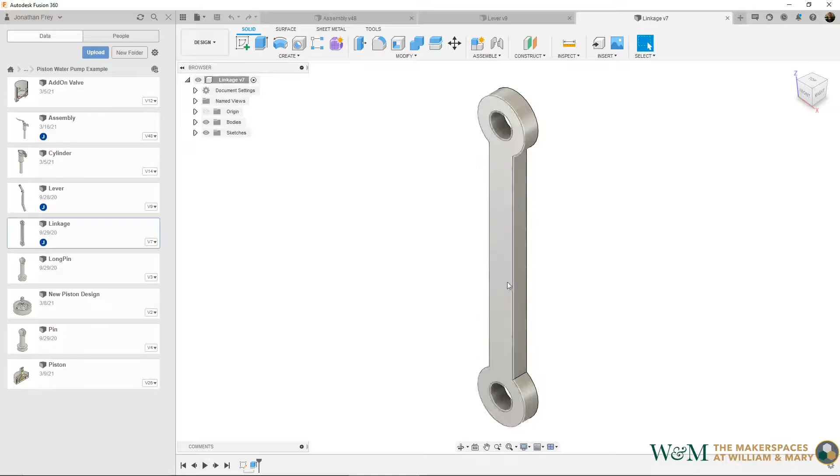So the last part of this piston pump design is how we actually put together the parts and then end up going through finite element analysis to look at where it's going to break. You will notice that I'm skipping over designing the individual components like the lever arm and the linkage pieces like this. These are fairly straightforward sketch and extrude type designs, so there's lots of information online that you can find to help you get through these. We're going to focus on the more advanced parts of this pump design, including putting it together and the simulation.

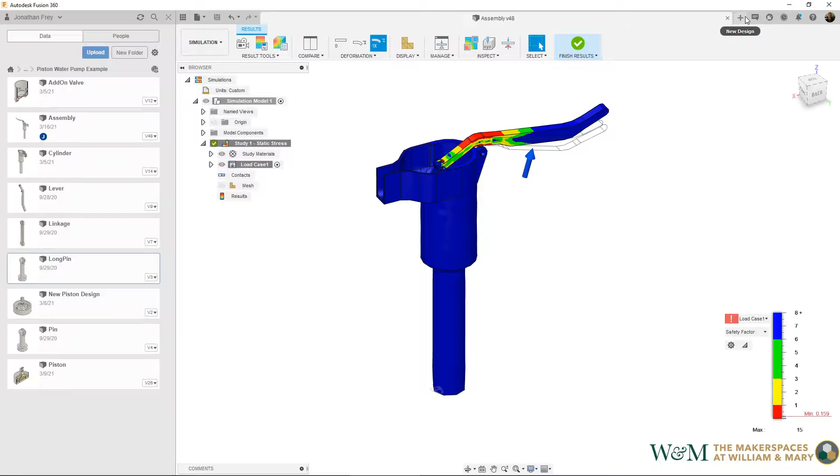All right, so to put it together, the first thing we need is all of our parts. As you can see, I have them here at the left. I like to keep everything in a single folder. I advise you to as well, although everyone's organization is different. And then we need a new blank file within which we're going to assemble things. So this is a new file. I will go ahead and save this as whatever, new assembly. And then I'll start pulling in the parts.

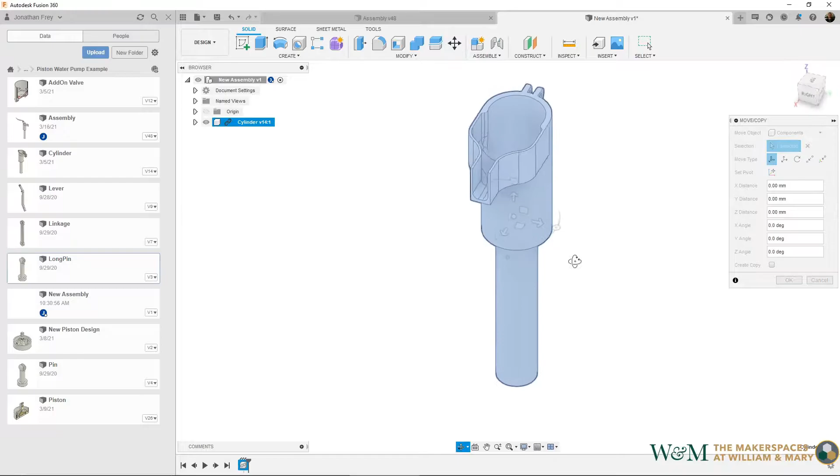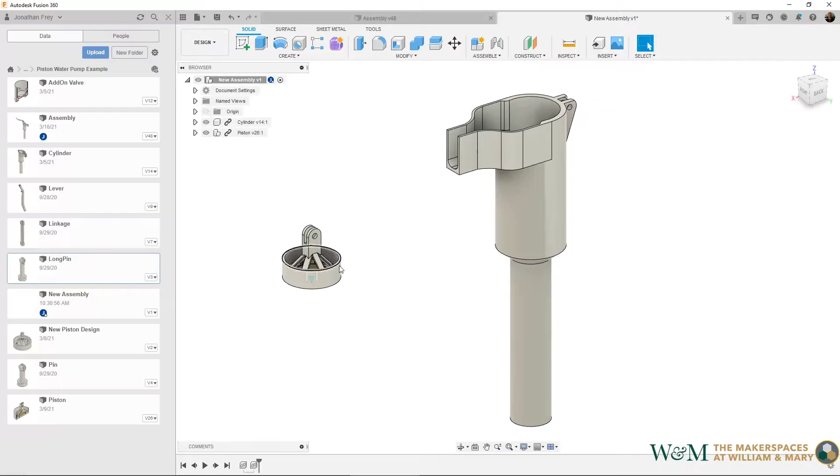I like to start with the biggest part first. How you build it is up to you. So I'll click and drag the main cylinder in, like so. There it is. And I'm just going to leave it right where it sits in the middle there. And then next I will drag in the piston head, which is right here. And I'm just going to move this out of the way so I can see it. Right. And we're going to start building our joints. So we've got the first two pieces and we need to put this one into this cylinder.

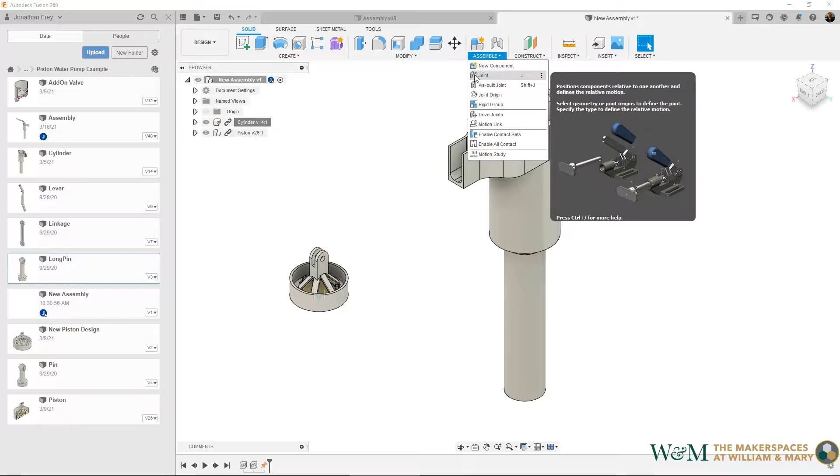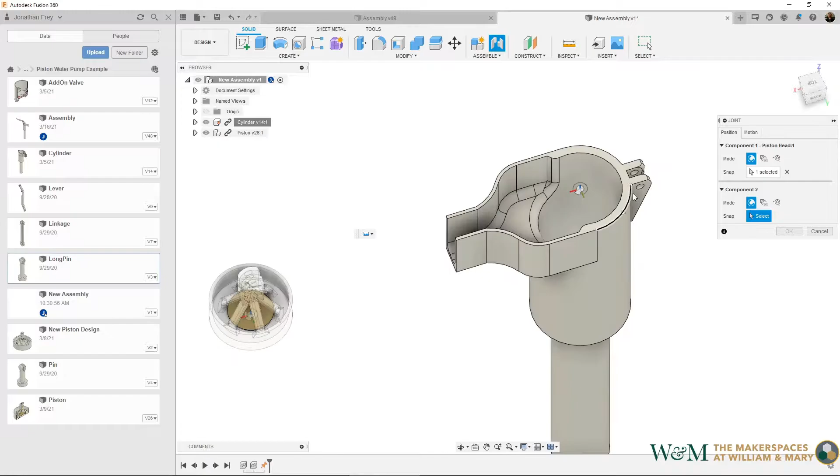So right off the bat, I'm going to ground my cylinder. That's designating it as immovable relative to everything else. You get that by right-clicking on the component and pulling it down to ground. Then I'm going to go to the Assemble menu and use Joint and joint the two parts together. The first one I'm going to do is this piston, and I want the snap point to be the center point here of the main body. So I will click that, and then I need to click in here where it's going to be jointed. So I will put this, let's say, at the top for now, like that.

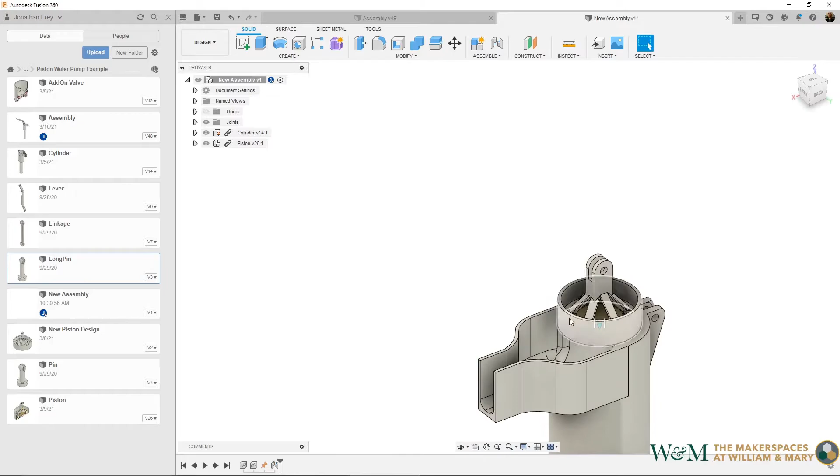And I want to make sure the motion that I've selected is a slider motion in the z-axis, like that, which it is. So I'll hit OK. And now we've got our piston head that can be pulled into and out of there. So I'm going to push it down just a little bit as I build this to make it easier. So put it there, hit OK, and anytime you move it, if you would like it to remain in that position, make sure that you go up here and hit capture position. And now that is the default starting point.

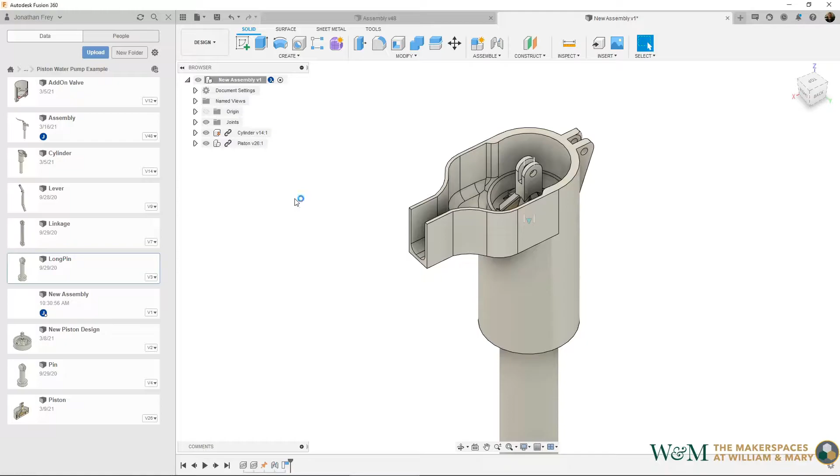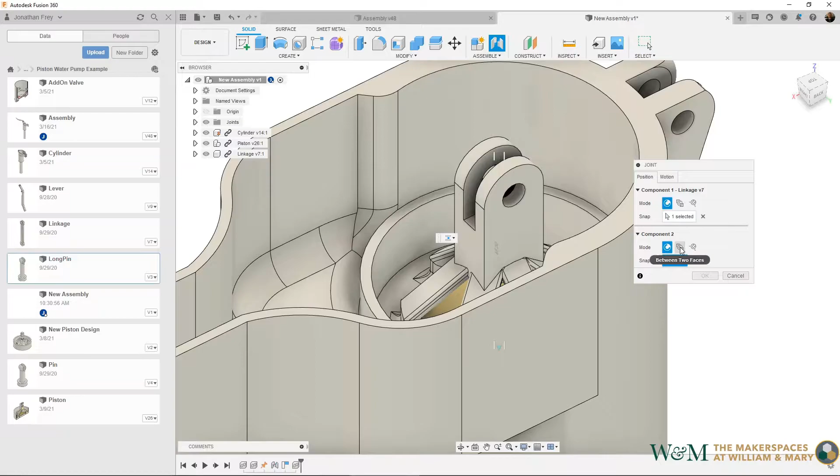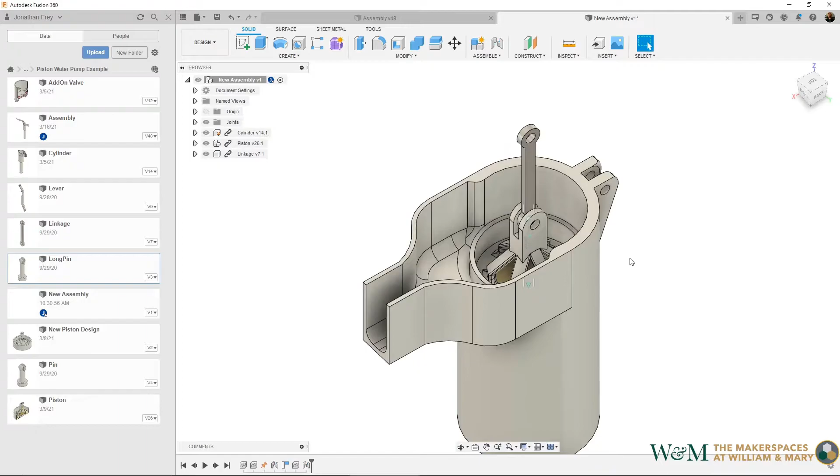Okay, so I've got the piston, I've got the cylinder. The next one up the chain is going to be the linkage here. I'll drag that in, move it over, and I want to joint this. I'm going to use the center snap point of this cylinder there, and then put it in between two faces, specifically that one and that one, at that center axis snap point. Now this is going to be a revolute joint. And there we have it. So hit OK.

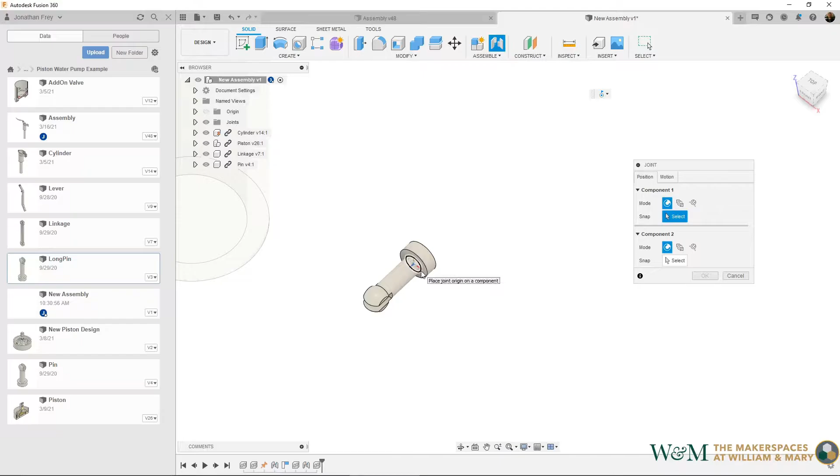I will go ahead and add the pin as well. For that one, I believe I'm using the short pin. So short pin in. We're just going to position it like that. And then do the same thing, just joint. In this case, I'm going to select there and there. Like so. That's a revolute joint because it can spin freely as well. Hit OK. Right, and I'm just going up and down the chain, building it out.

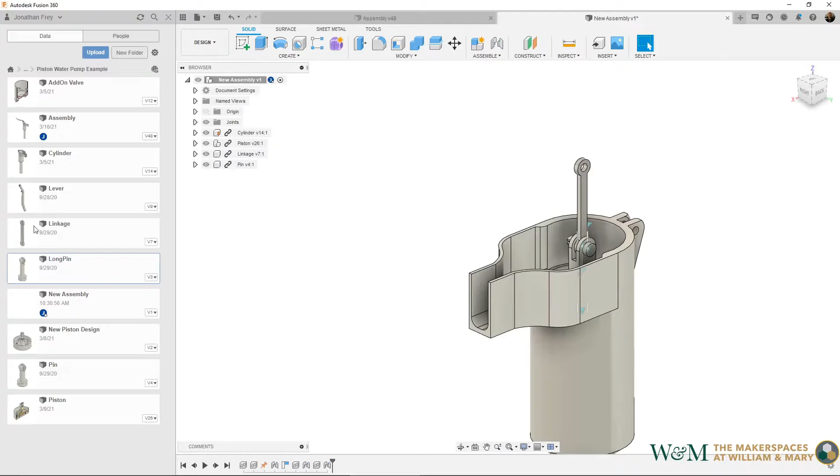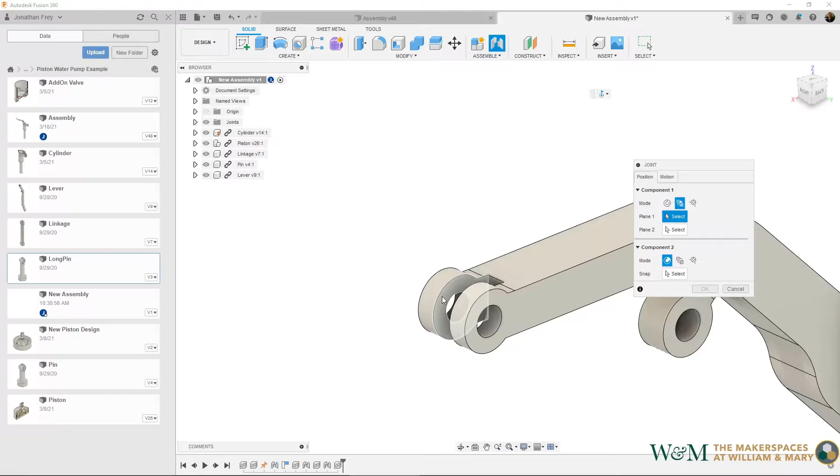So the next one is going to be the lever. We're going to move this over, and I'm going to swing this around so that it's roughly in the orientation that I want. It doesn't have to be perfect. Like that. And now again, joint. This is going to be one of those times where I'm using between two faces. That face and that face. And the snap point is that center point in the axis right there.

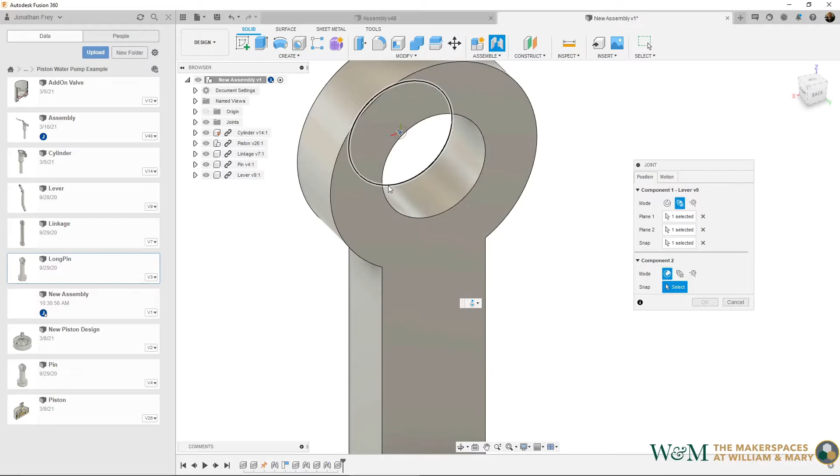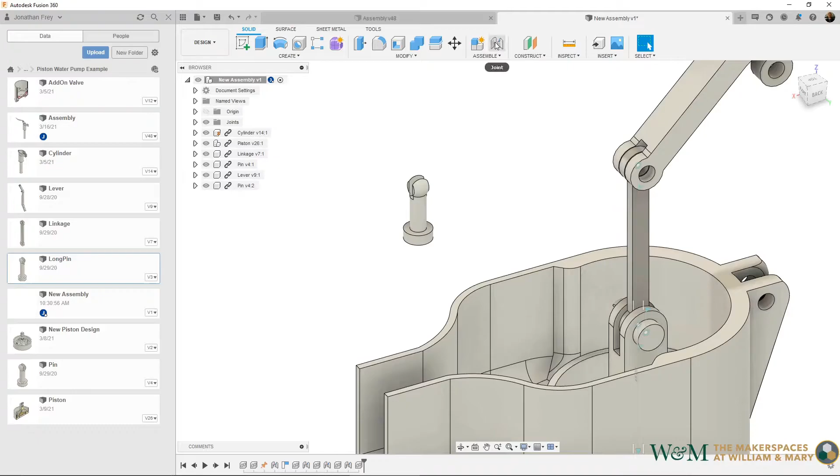And then I'm going to snap it to the center point of this axis, which, there it is, that point right there. Okay, and that is a revolute joint, so we'll hit OK and add in another pin. Now just to show you, I'm not going to orient this in the right direction. If you joint these together using the correct snap points, it should orient itself, like so.

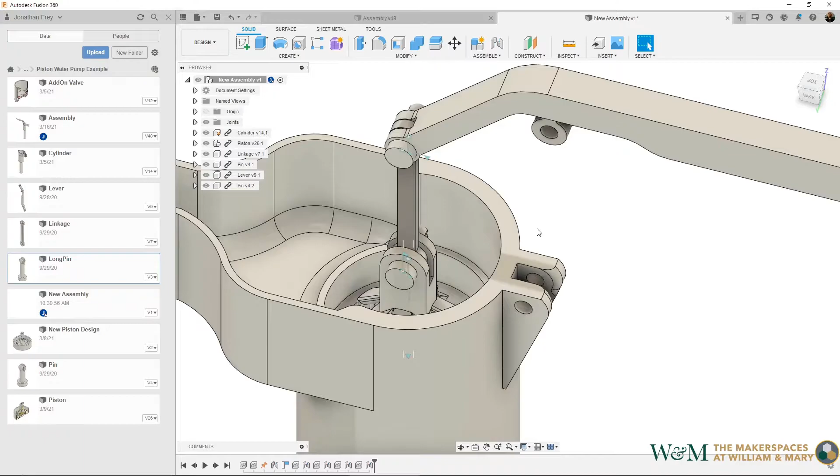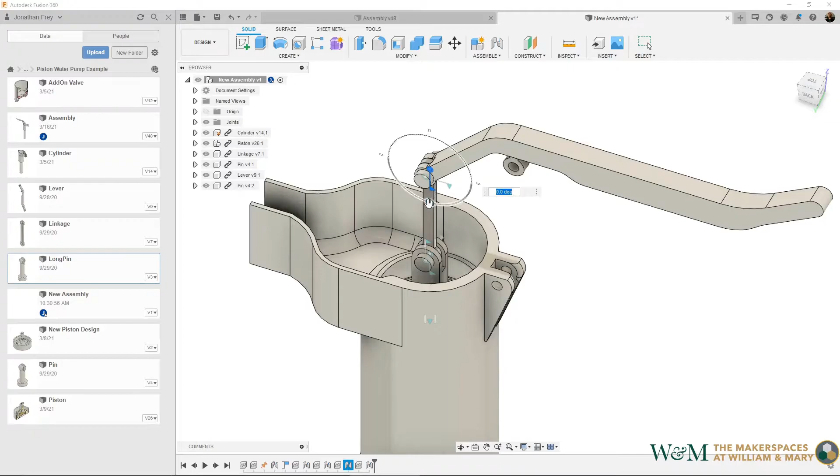Okay. Then the last place that I need to joint together is this one to here. Now when I do this, it should move the piston and everything else accordingly. But we're going to see. To get it closer, I'm going to go ahead and pull this. Let's rotate this actually. Oops, that's the pin. Okay. And then joint. Again, we're going to use this middle point of this axis, right?

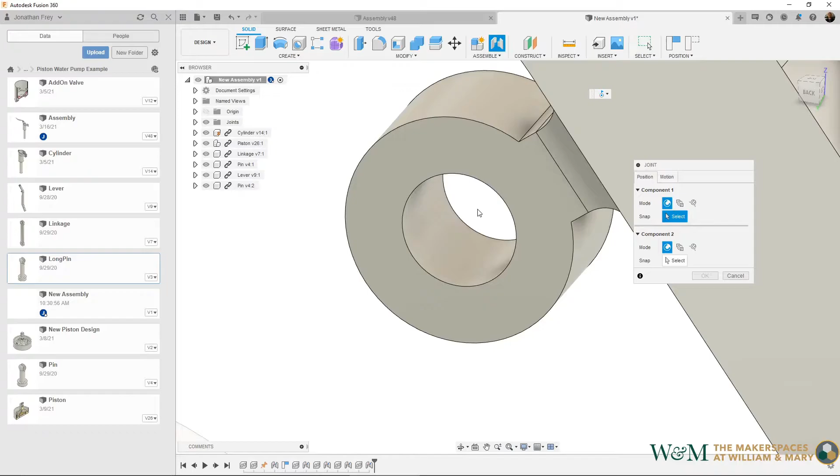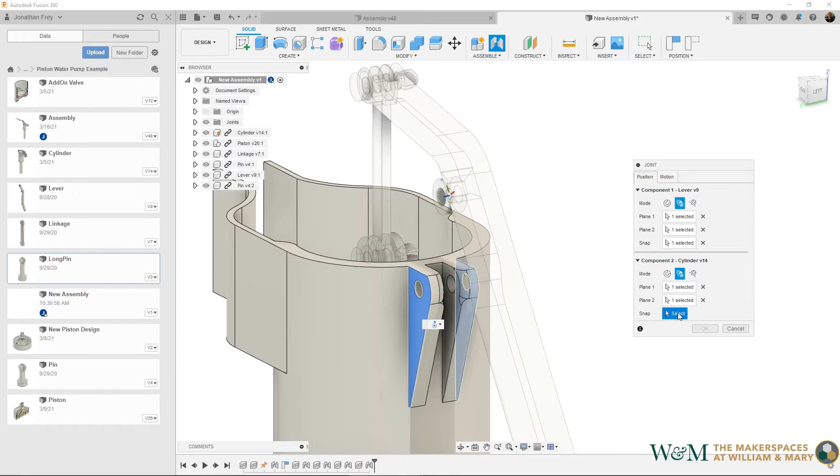If you have trouble selecting that middle point like I am right now, you can always switch over to using between two faces. Select that face, and then the snap plane, like that. Boom. Okay. And then we'll do the same thing between two faces. And I'll use the outside. Right, outside or inside, it doesn't matter because it's all going to be centered. So between those two faces, the mid plane, and along that axis gives me that point. Like so. Okay, and we'll hit OK.

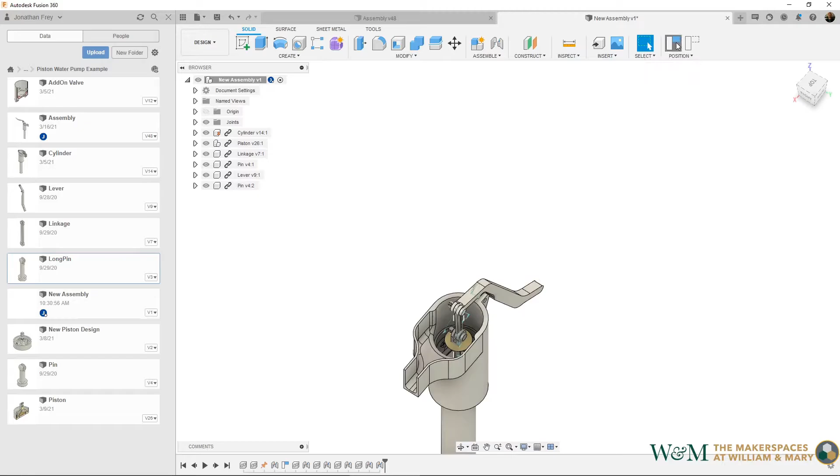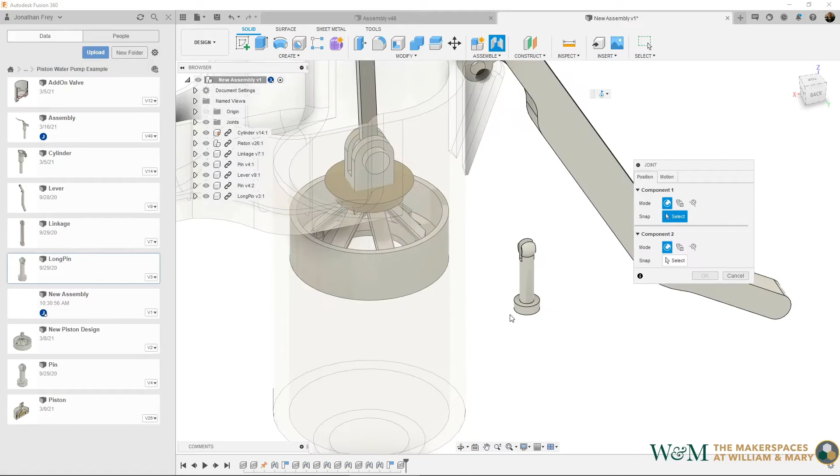Boom. And you can see it's now moved it into position, and we'll just slide this down so that it's not going through the body. Okay. And you can see the cap is kind of not in the right place. We're going to fix that in a second after we finish adding the pins and everything else. So for this one here, I need the long pin. I'm going to bring that in, move it out of the way, and just like every other time, we're going to joint it using that and that. Now, it went in backwards, obviously, so I'm going to unflip it and hit OK.

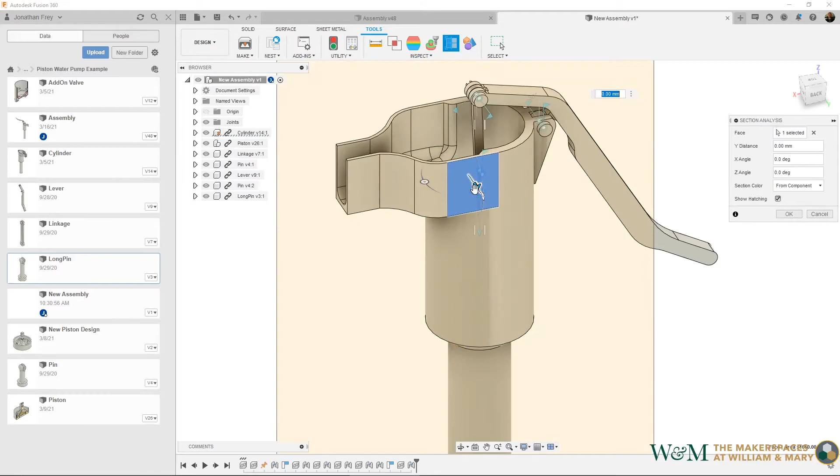Good to go. So that I can see what's going on inside, I'm going to go ahead and insert a section analysis plane. That'll help us see. I don't want to cut too far into it. I just want to be able to see through that chamber, so I'm going to leave it right there, like so. Okay, so now you can see we've got this guy moving. Unfortunately, for whatever reason, this is uncoupled.

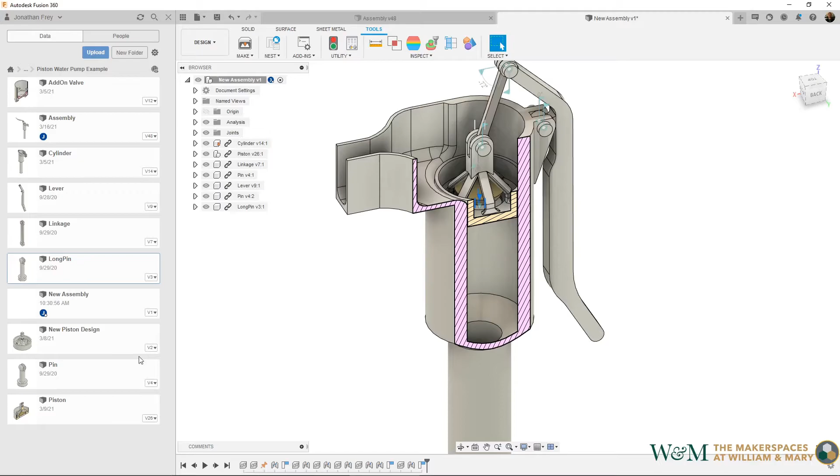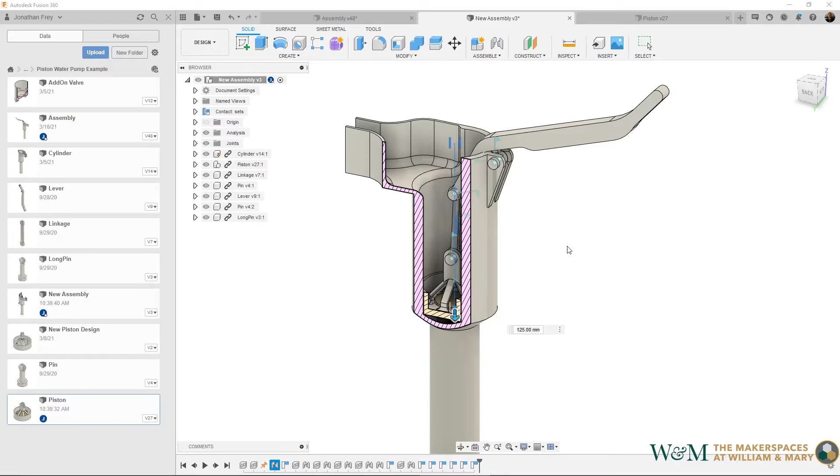So we want to make sure that our piston head goes back to being locked together. And we'll move it back into position like so, and then capture the position. And we can go ahead and turn on contact. All right, so we've moved the piston head and handle all the way down into the assembly, like that. And we've captured the position. So now we're going to go ahead and turn off the analysis, like that. And save it. And then we're going to switch over to the simulation environment.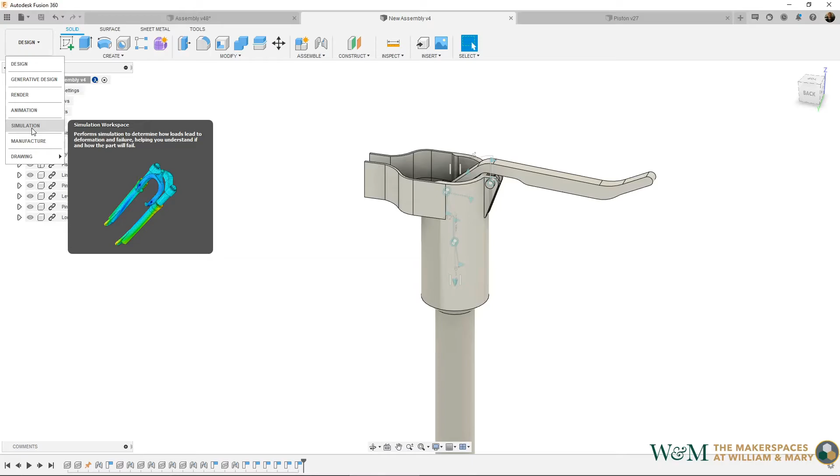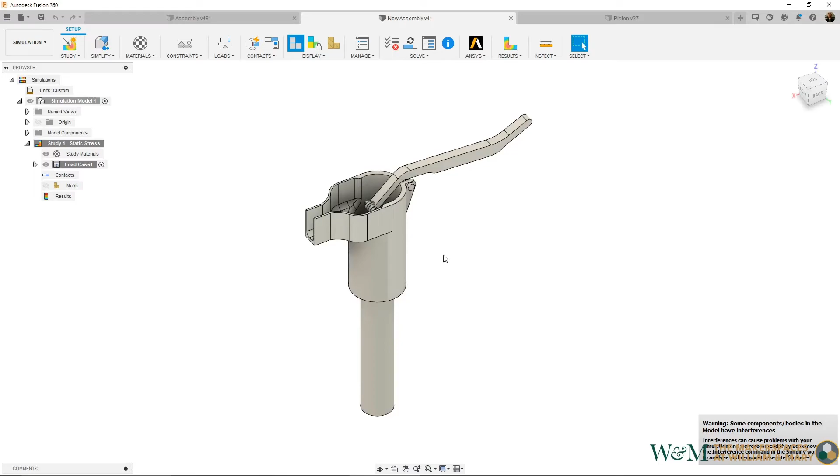So again, what we're going to simulate is with the piston pump in its downmost position for the piston head or upmost position for the handle. If you were to keep pulling on that handle, when would it break? So that'll be a static stress simulation. We've already assigned ABS plastic to this. So then we're going to just do a couple things. First, we're going to add the load.

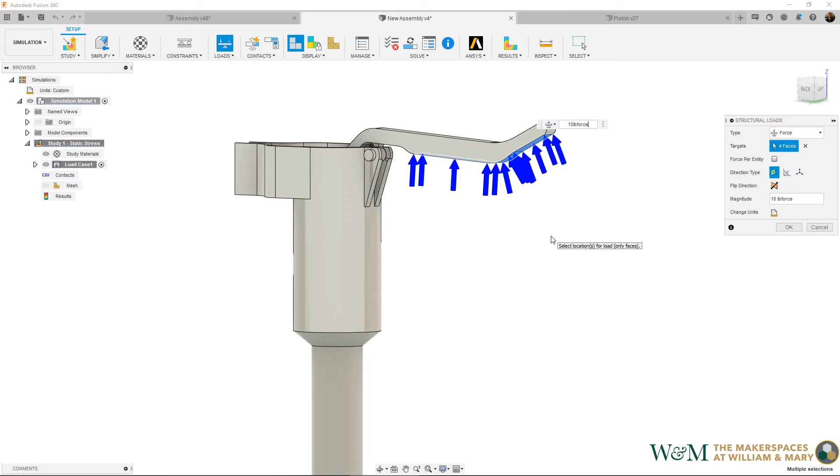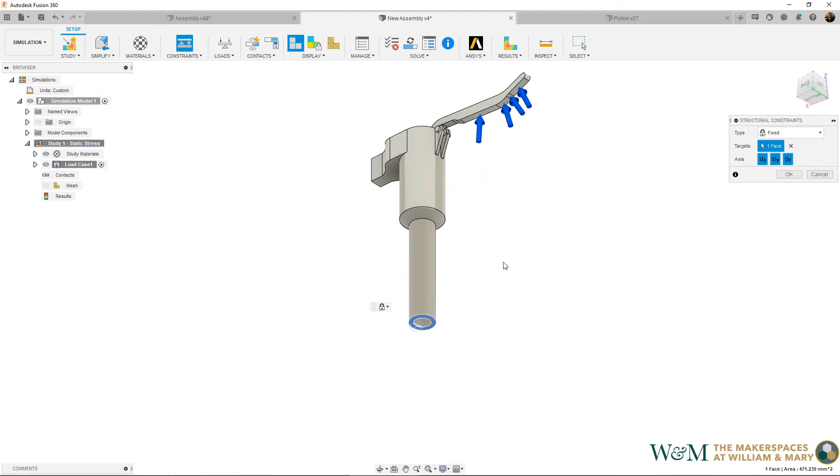And the load we can put effectively on these faces as if you're gripping onto it and that's where you're pulling. And we'll say we're pulling up with 10 pounds of force. So decently strong pull. Okay. We need a constraint for this. So since it's as far away as possible, we're just going to constrain the bottom here, saying that this bottom face is fixed. Maybe it's attached to a hose, maybe it's affixed permanently on some other material, doesn't matter, but we need one constraint at least, and we'll use that. Okay.

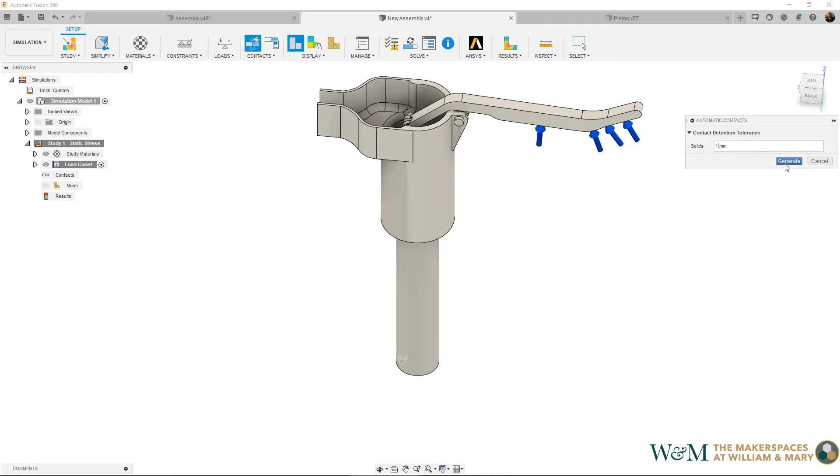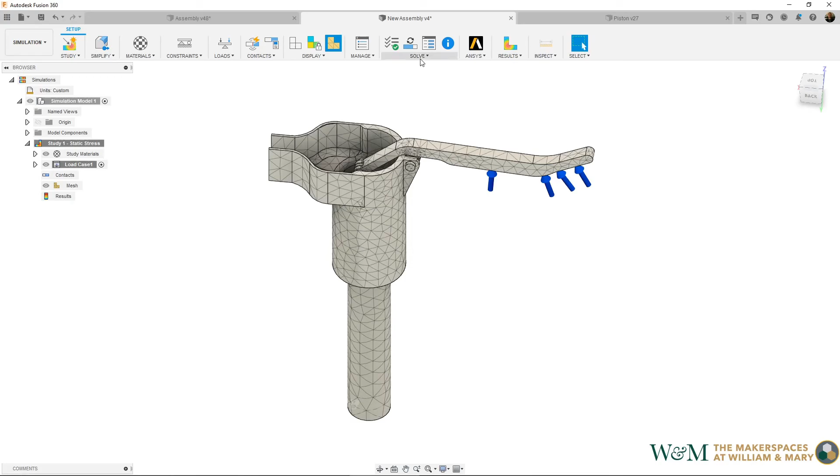All right, and now we're going to establish our contacts. So we want this to simplify the simulation. We're going to assume that any two parts that are within a millimeter of each other are effectively rigidly joined. They're in contact, if you will. And now we can generate our mesh, like so. All right, there is our mesh generated. And the last thing we do is solve it. So we go down here to the solve menu, hit solve. I'm going to do this locally because I'm working on a desktop computer that's decently powerful. I'll hit solve and we'll wait for it to come back.

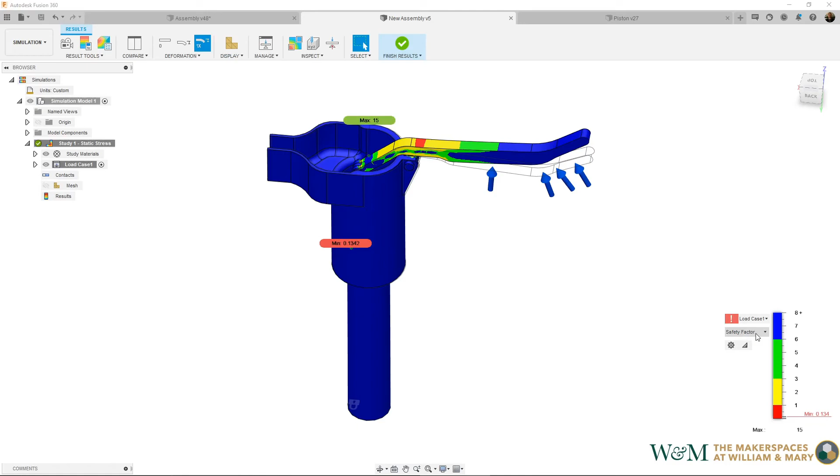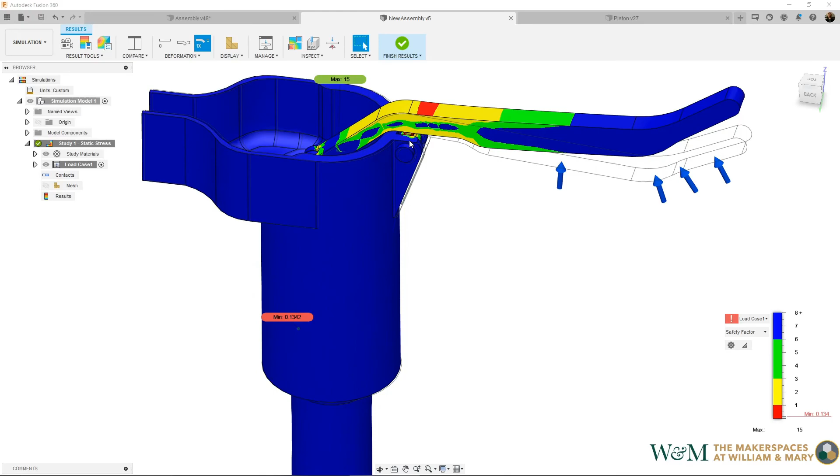Okay, so you can see the results have come back. And right now this is showing the safety factor, which takes into account a number of different things. We can also look at stress, how far things have displaced, right? Reaction force, strain, etc. on this. We are interested in safety factor, of course, and with that amount of force, this design, and again, this design was made out of ABS plastic.

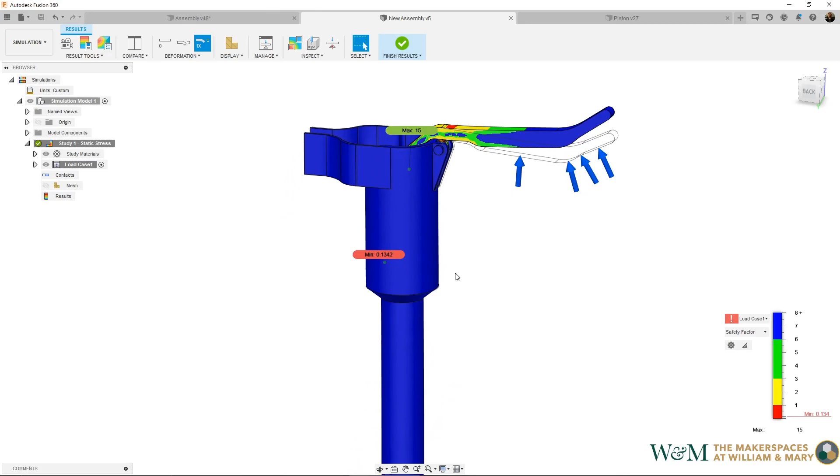We have some weak spots here and here around the handle that are likely to break. And as I showed in part A of these videos, that is actually where the pump broke when we took it to failure in real life. So that is it. I hope this design process has helped you understand how to make a water pump using just 3D printing and Fusion 360.